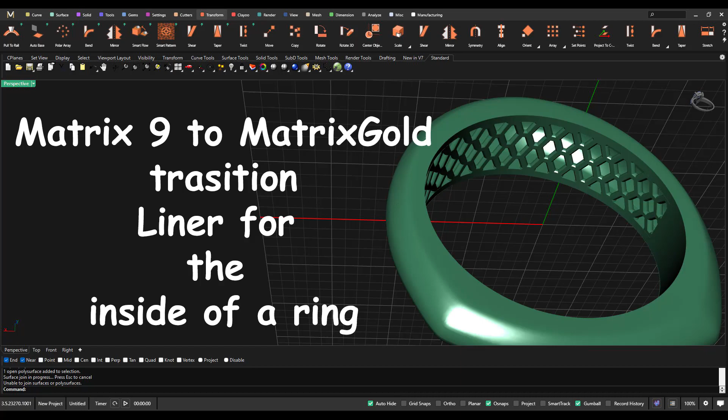Okay, here we are back inside MatrixGold once again.

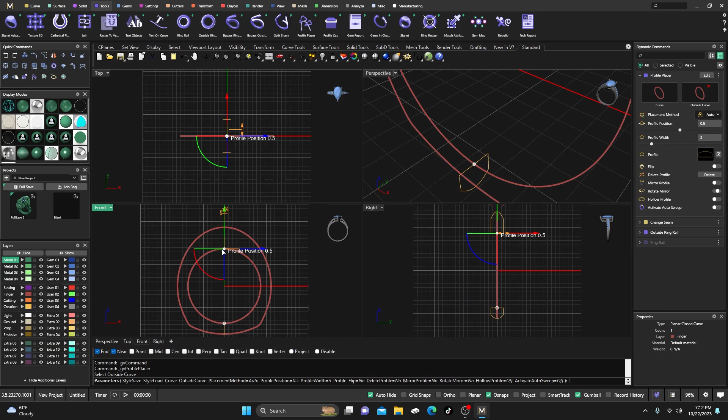Now, if you do a rounded edge, you'll have to do a little bit of extra work, and I'll explain that as we go forward. So what we're going to do is kind of keep it easy for this video, and we're just going to do a kind of a where it goes to a point on the end. So I'll double click on that one. And we will go ahead and bring this in just a little to around a 3, and then we'll also add another one holding down shift at the top, and we'll take this one and make it, holding down shift, to a 6, so double the bottom, right? And then we'll hit enter.

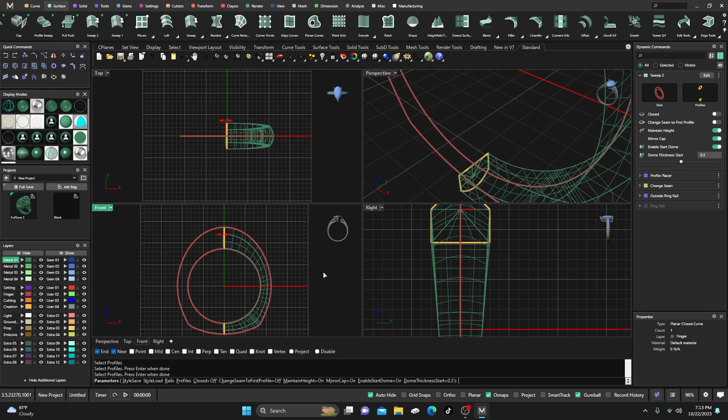And from here what we'll do is go and get our surface. So sweep 2, these two rails here, this profile, and we'll hit enter, and we'll go ahead and just close that off in our dynamic commands over here, closed, right? And it'll give us our surface, and we'll take a look at it here real quick. See, make sure it's okay, what we want, and we'll just hit enter.

Okay, now this next part, we're not going to do it this way, but in case you didn't know, you can go to your surface, grab a planar curve, and we'll switch this to a cutting layer, and we'll just kind of draw it out. And you can go to solids and do a Boolean difference with this surface here, and enter, and it will actually do a Boolean difference for you. That is too cool, right? Just so you know, it's available, but we're going to back out of that. We want to keep that bottom half, so we'll just go back.

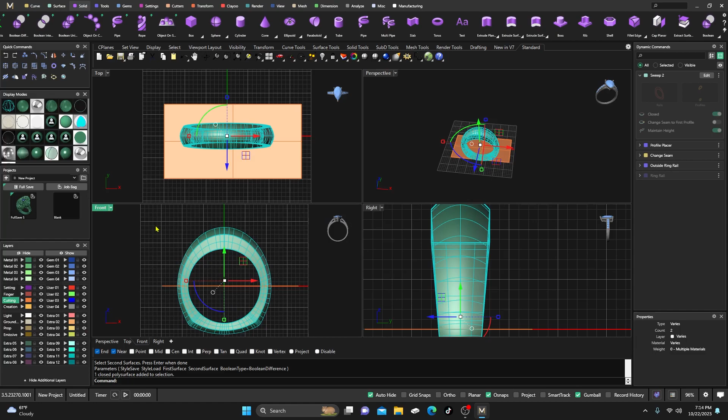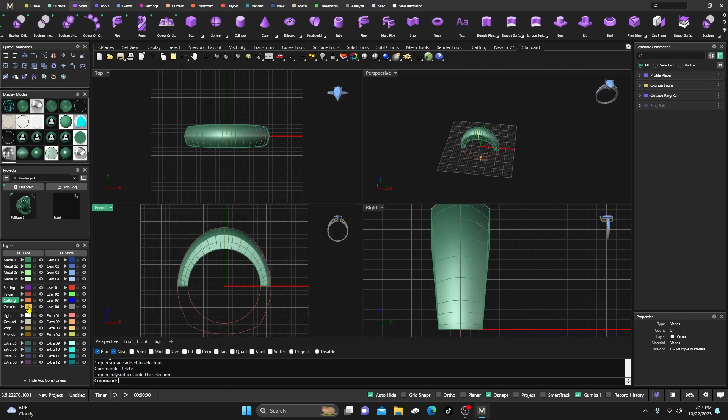Now we're back to our solid closed poly surface. Watertight, right? Now we'll just take this poly surface and we will split it with our planar curve, right? And enter, we'll delete that. We'll select our bottom half and we'll just hide it. And now I'm going to grab all my yellow since we're here, turn it to gray. We definitely want to keep those in case you ever want to make any kind of alterations. But after we do this next command, it probably won't matter.

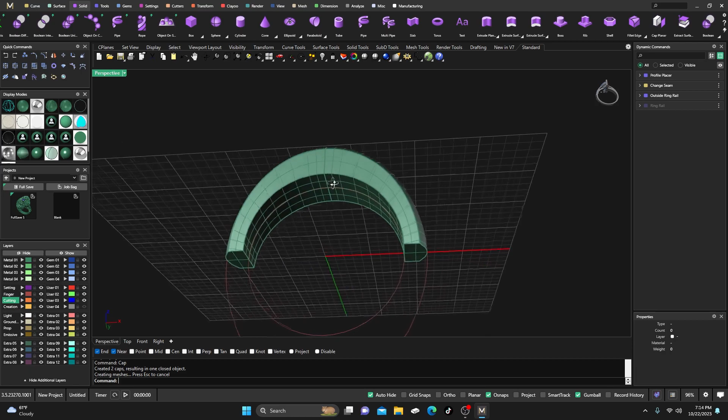So we're going to go in here and we're going to do a cap and hit enter, so we cap those off. And from here, like I said, if it's rounded or if it's one surface, you'll have to... this is a poly surface, right? So it's made up of multiple surfaces. There's a knot right there, it looks like. This next step will be really easy. But if it's not, what you have to do is you'll have to do the cutout with the object, and I think I have a video on that, how to do a hollow ring or something like that, so you can check that video out. Yeah, so it's a little bit different, right?

But with this way, with it being a point object there, right? What I can do is I can just go to my shell command right here in my solids and select that, and then select the faces to remove, and I can go from here, here, here, and here, and then I have it set at a thickness of 0.6, and then hit enter, and it does a 0.6 all the way through.

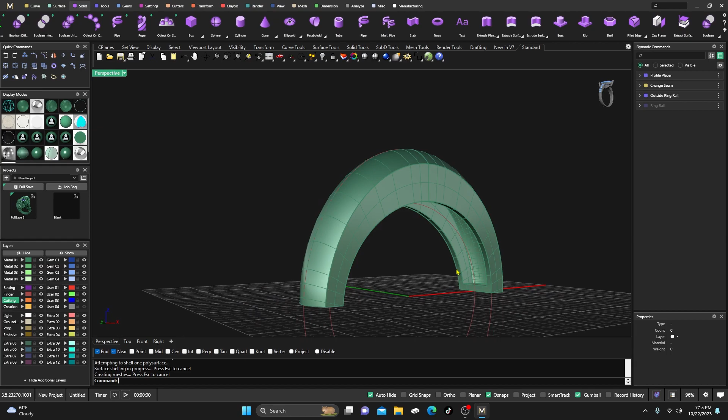So now everything, this section here is a 0.6, these are 0.6, and my thickness at the top there is a 0.6. So it just cuts it all out really nice and neat for you, right? Which is pretty cool, very quick, right?

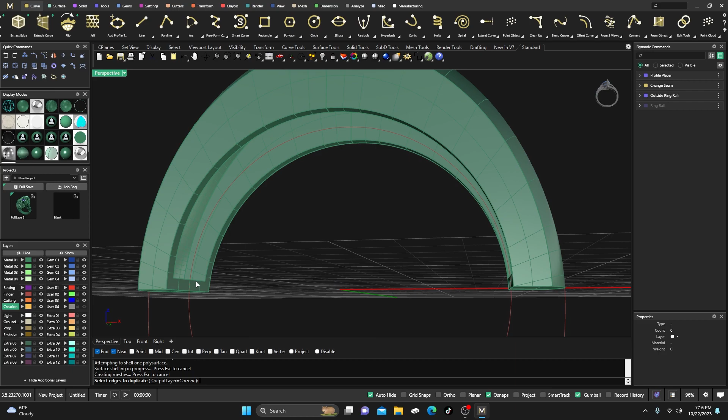And now what we want to do, we want to go to our curves, and I'm going to go all the way down here to from object, and I'm going to grab my duplicate edge. I'll grab my duplicate edge, and then I'll change it to yellow here, and then I will select this one, not that one. Back out of that. I want this edge right here, those two, and I want the two right here, and then I'm going to hit enter right away and then join those together. So now they're one curve, right? I don't have to go back and reselect them later.

So now I'm going to come down here on my command line, right click, and I can do that dupe edge command again. I'm going to select this curve here and this one here, and then come over to my other side, select that one and that one. So now those are one curve. Hit enter and then join those together right away, and make sure that they're joined. Oh, they're not. Oh, hit enter.

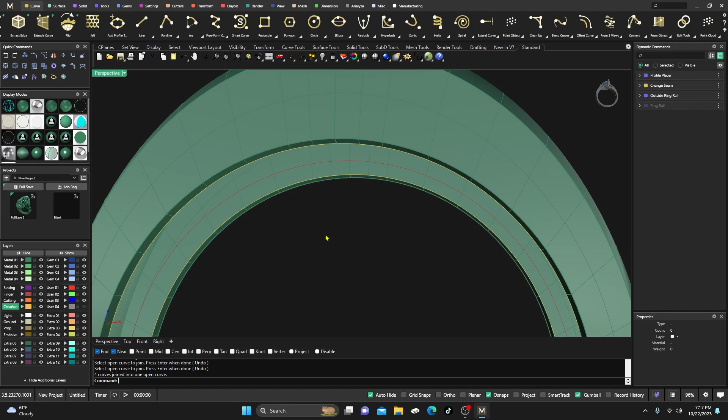Join curves. This one, this one, this one, and then hit enter. Check them out. Yeah, okay. Oh, they're all joined together now. What's up with that? They're grouped or something, so I'm going to ungroup them. But now I probably have them individual. Oh, no, they're good. That one's one. Nope, they're still joined together somehow.

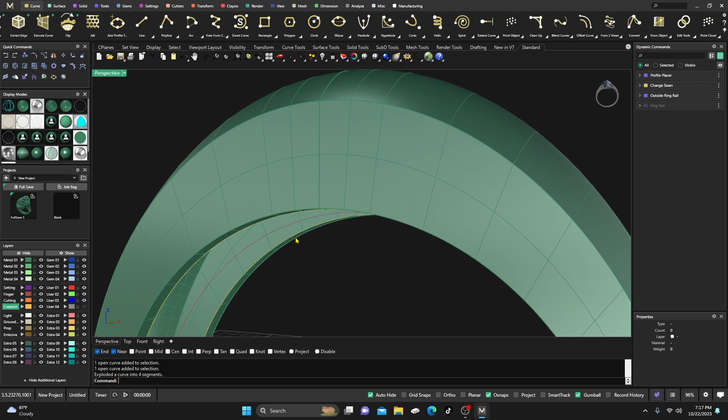All right, let's explode them. Don't know why that happened. We'll grab this one, hold down shift, grab this one here, join it together. Yeah, we're good to go on that one. Grab that one, hold down shift, grab that one, and we will join those together. Yeah, okay, we should be okay.

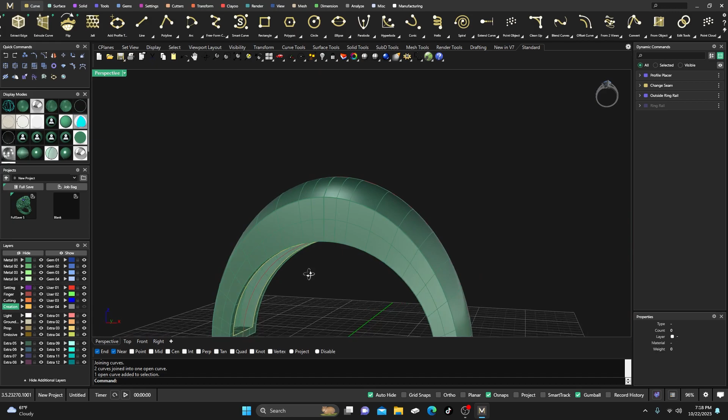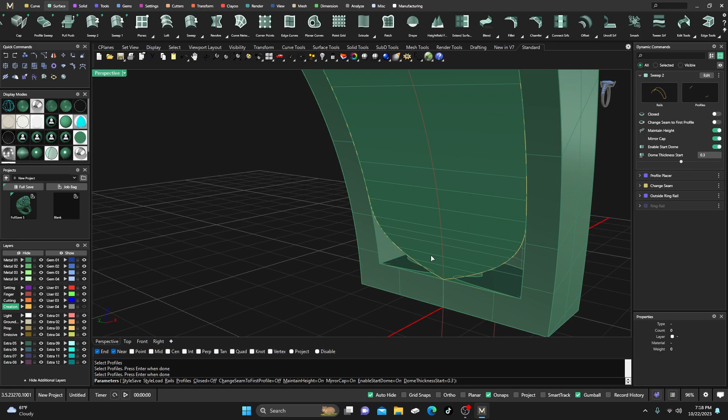Now we need to get a surface in there, right? So we'll go back to our surface. We'll do a sweep 2 from this ring rail here, this ring rail here, that profile there, and the one over here, and hit enter. And oh, something went crazy there. Okay, all right. So let's back out of that. Let's get rid of this here and get rid of this here. I don't know where that came from.

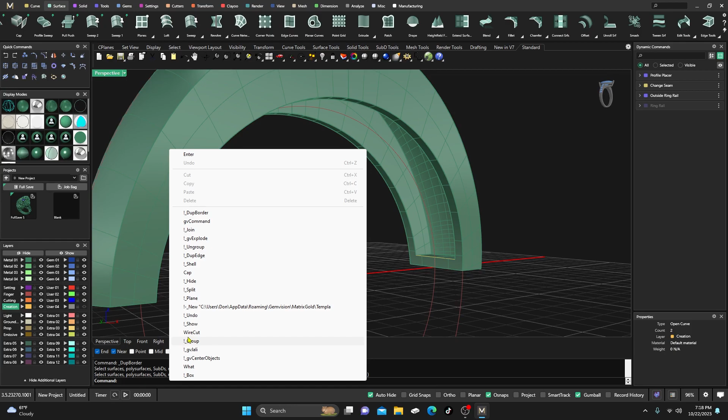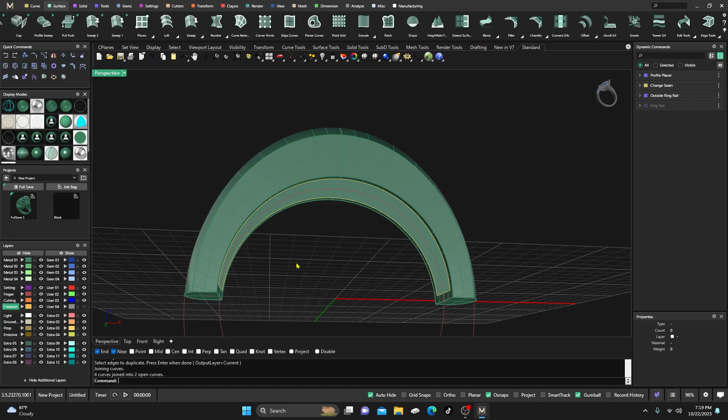We'll go back, right click in here and go back to our dupe border. And we're still on yellow, so we're good to go. Dupe edge, sorry. Dupe edge. Right here, right here, right here, right here, hit enter and join. Yay, okay. I don't know what happened there. I did something crazy, huh? Maybe you can tell me what I did. I must have spaced it out.

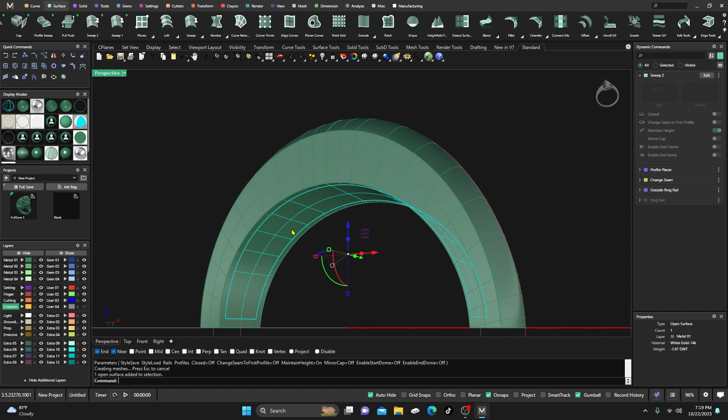So let's go ahead and do that sweep now. We're going to select this curve here, this curve here, this curve, and then this curve over here, and hit enter. And we're going to maintain height, and we're going to get rid of everything else. All right, and we'll just go ahead and hit enter. So we accept that surface. We'll change it to a different layer here, so it's that layer. All right, and we have that.

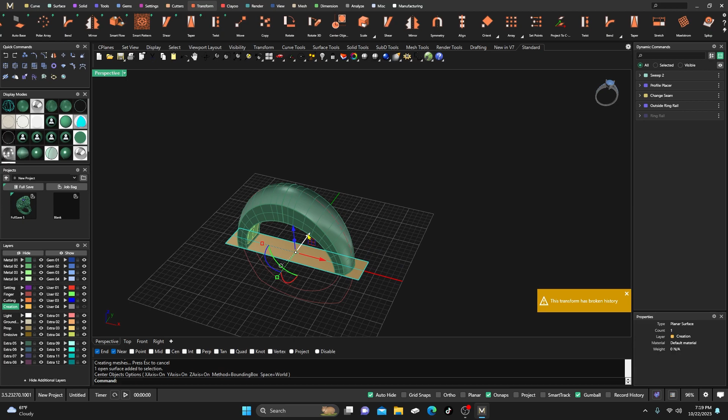So at this point, it's real easy. Just go ahead and go grab your transform there, grab your auto base, grab your surface, go ahead and hit enter. I'm going to grab my auto base and put it in the center. It's not something that you have to do. Hit enter and it'll put it in the center, and I'm going to drag it out. Like, again, it's not something you have to do. It's just what I do. I'm going to change this to a ground plane.

And then I'm going to take that, go to my curves, go all the way back down to that from object, select in there, and duplicate border. I'm going to duplicate the border, but I am going to switch to a red layer here and then hit enter. So I have a red border going around, right? I don't want that. There's that, and I'll get rid of one of those. Don't need both of them. My border going around in red, right? Okay, so I have that out there.

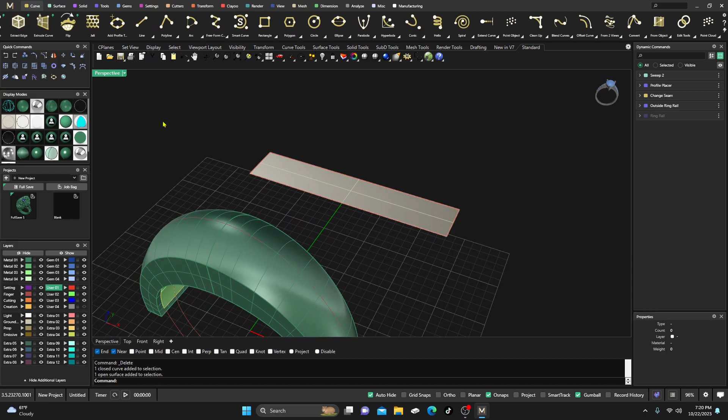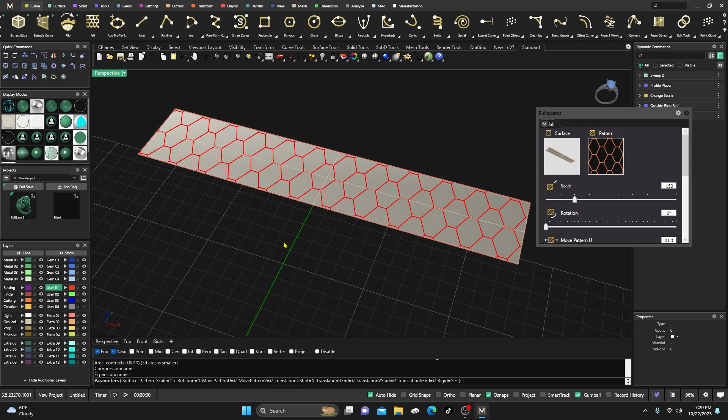Now we'll go ahead and just do a Jali on this surface here, and we'll choose a pattern. We'll do a honeycomb style here, and double click that. And that's a little too tight for my liking. We're going to loosen it up a little bit. So just scale it up however you want it. But we'll just go ahead and take this, and we'll go ahead and hit enter here, right? And we'll select our Jali.

Select our Jali there, and we will go to solids and pipe it. Give it a few seconds and it'll lay it all out, then we'll hit enter. All right, so there's our poly, or our liner.

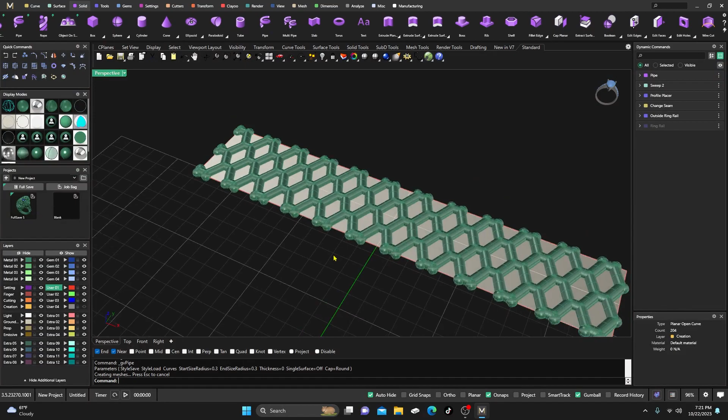Now the liner is usually cast separate or made separately. A lot of people will just roll down a sheet and do a cutout for the liner. But if you're going to do a liner, you probably don't want it attached to the item when you cast it, because you won't be able to get up in there and polish it all nice and highlighted, unless that's the look you're going for. Usually high fashion designer jewelry will have that all nice and polished on both sides, and then the jeweler will go in and tack it with either a laser or solder all the little joints together. But that's personal preference, up to you.

So let's go to transform, let's go to Smart Flow. Let's select our base surface there, and then our destination surface. Rhino says if you pick it in this corner, the bottom left, you want to pick in the bottom left of that corner. I don't know if Matrix has that kind of deal, it doesn't really matter, I'm not sure. I just kind of went with that habit, that's what I was taught when I first started doing Matrix.